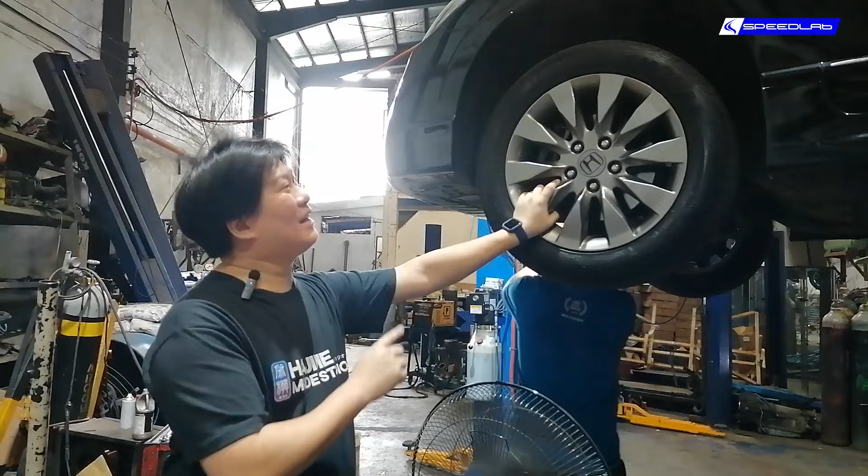Today we'll show you how to properly upgrade the 1.8 Civic. This actually doesn't apply just to the Civic, it applies to everything with the Honda R series engine, which includes the CRV, the HRV, the Civic, all generations from this one, the FD, '06 all the way up to the present one, the 1.8. It's still the same engine up to 2024. They haven't changed it. And the CRV, the R20, I think only appeared in one generation, the third generation. That's about it. Yeah, so everything will be the same.

The intake will be the same. The header will be the same. The exhaust piping will be the same. Even the remapping procedure will be exactly the same for anything that has the R series engine. So we'll start by taking out the stock components, which is the intake and the whole exhaust, and then we're gonna be putting it on the dyno. Then we'll be remapping it by reading the stock ECU and pulling out the data. We'll modify that and write it back to the ECU.

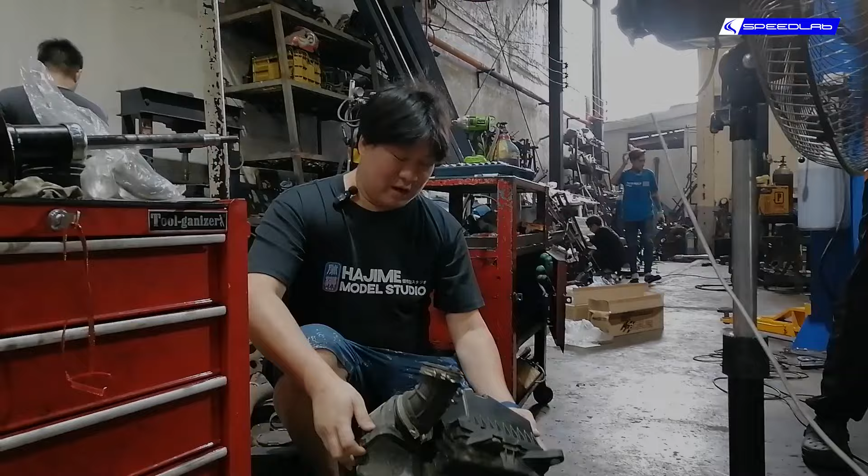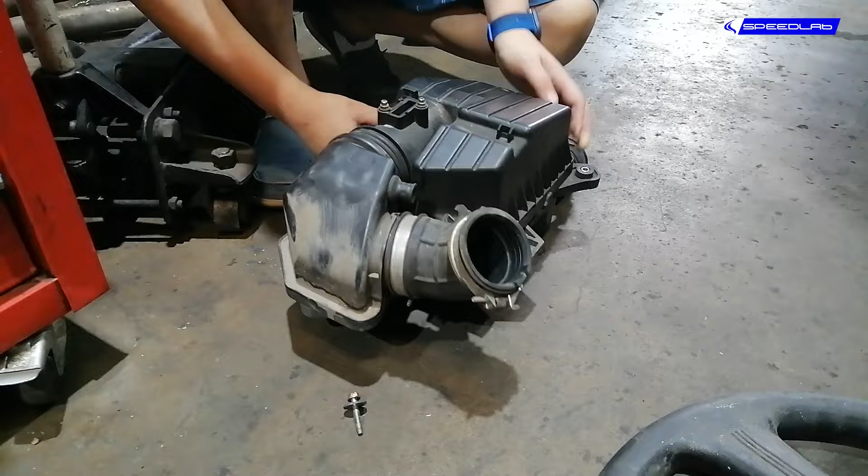Okay, we've removed the stock intake, and this is all there is to it. Actually, there's still a big silencer here at the bottom, which we just leave. We don't really need that anymore. So the important thing that a lot of people ask is what happens to the sensor, which is over here. This is the mass airflow sensor. That has to go back. If this doesn't go back, the car won't run. So we're changing it out with a short ram intake. So basically we're replacing this entire thing. We're changing this out with a K&N cone filter.

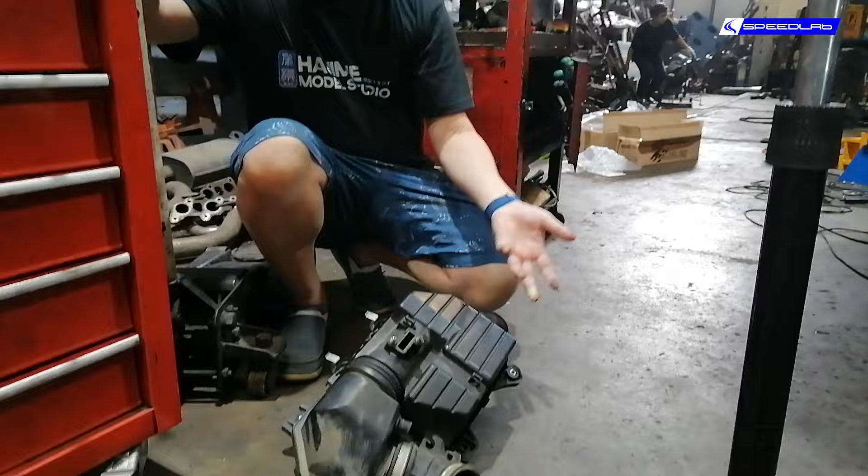So the biggest advantage of having a cone filter is that there's a lot more flow to the filter. So you guys have been masking for the last 2 years. The easiest way to put it: the stock filter is you have a mask, and if you change to a K&N, you just take off the mask. So you breathe a lot easier. You breathe in the same amount of air, so your lung capacity doesn't increase. It's still about 4 liters for an adult. The same way, by changing to a K&N filter, you do not increase the air volume. That's the number one misconception that people keep saying on the internet.

By changing to an open type intake, you increase the volume of air going to the car. Wrong. That is totally wrong. It's still 1.8 liters. It does not magically become 1.9. It does not magically become 2. What happens is you increase the flow, or how fast or how easy the air gets into the engine. So that's why it's called a mass airflow sensor and not a mass volume sensor.

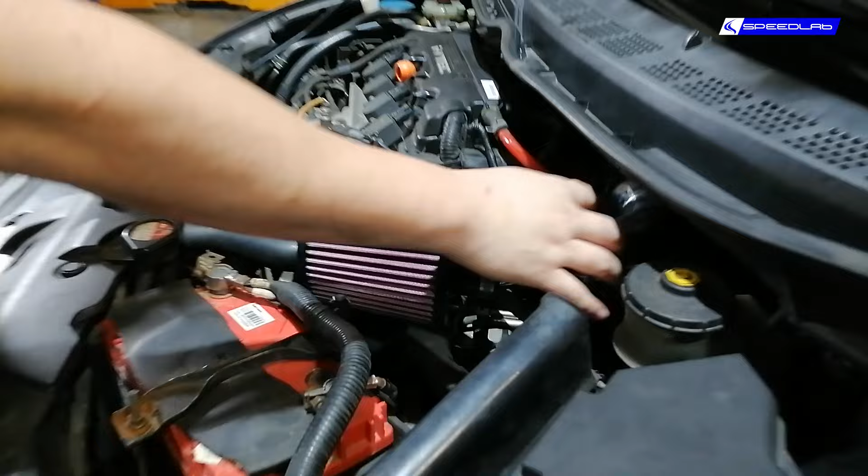And so here we have our entire intake system. It consists of the tube here. This is where the sensor mount is. This is the K&N filter. This is reusable, washable. You wash it once a year, and this will last you the entire lifetime. Or as I can say right now, by the time that we're all driving electric cars, this will still work. This will still filter. And this is the stock exhaust system of the Civic.

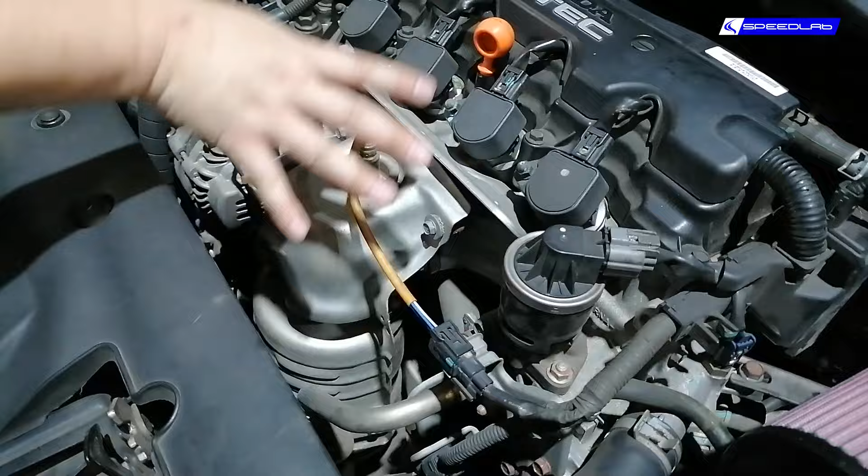This is the start of it. This is the header. It is a 1-1 header. It's not 4-1. It's not 4-2-1. So mind you, anything that you researched on the internet will not be applicable to this engine. So don't even bother trying. This big fat thing here, this is the catalytic converter. We'll get rid of that because that's a major source of restriction. And yes, you will still pass emissions.

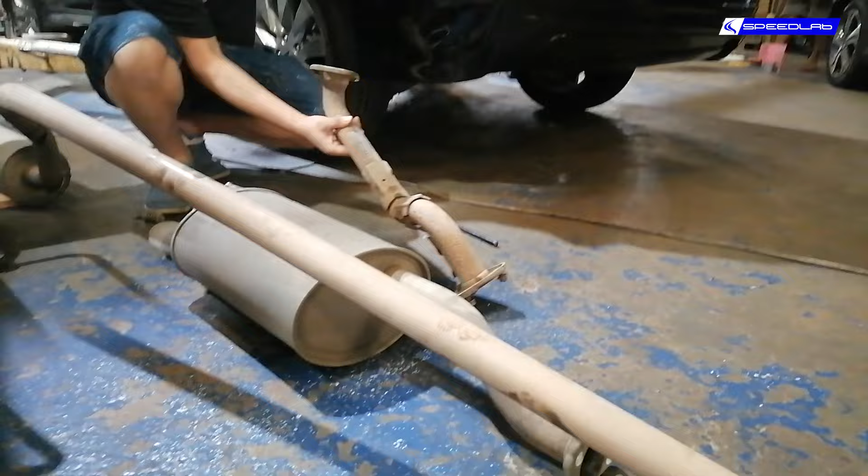This thing here is the oxygen sensor. This is the primary sensor. This is the secondary sensor. Both of these have to go back. If they don't go back, then that's where the check engine light comes in. Then we'll change this out all the way to the back. We've removed pretty much the rest of the exhaust system. So this connects to the header as you saw in the front. This is the mid pipe. So this is your entire exhaust system. This, for all intents and purposes, is the mid silencer or resonator, and this is the muffler itself.

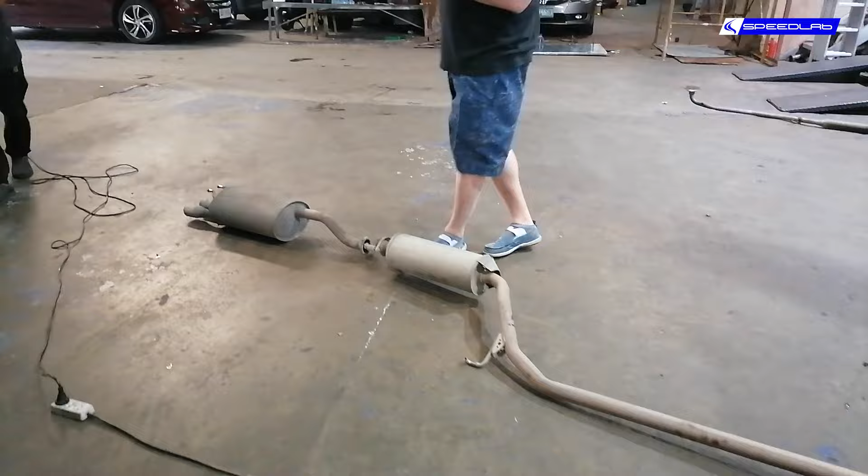Just for terminology's sake, anything that's in the middle is pretty much considered a silencer or a resonator. Anything at the back is considered a muffler. That's the common terminology. But in reality, every single silencer in the entire world is also a muffler. Now that's a bit confusing, isn't it? So we'll be replacing this whole thing with stainless piping. This is not stainless because as you can see it's kind of rusty already.

So we'll be changing out the back with a Tanabe muffler because the guy wants more sound. Again, the muffler's job is to muffle. To muffle means to make quiet. Changing out the muffler to something less muffling means it has more noise. I really don't understand why people confuse it. It's muffle. To muffle is to make less noise.

And the piping size we'll be using for this one is the same size as this one, 1.75 inches. And no, bigger is not better. That is a horrible misconception again that is on the internet. So you don't use 2-inch, you don't use 2.5, and definitely you don't use 3 inches. As much as possible, you keep it the same size as stock. Because the bigger you go, you make the engine air fuel mixture inside leaner.

It's not about back pressure. There's none of that. That's also another BS term. There is no such thing as back pressure. There is no equivalent pressure pushing air back through the exhaust. So no, that is another horrible term which I really hate reading. There's no pressure except for whatever atmospheric pressure we have right now. It's what we're breathing. That is the only pressure that we have here. There is nobody with a hose at the back of the car forcing air back to the engine. So it's not back pressure.

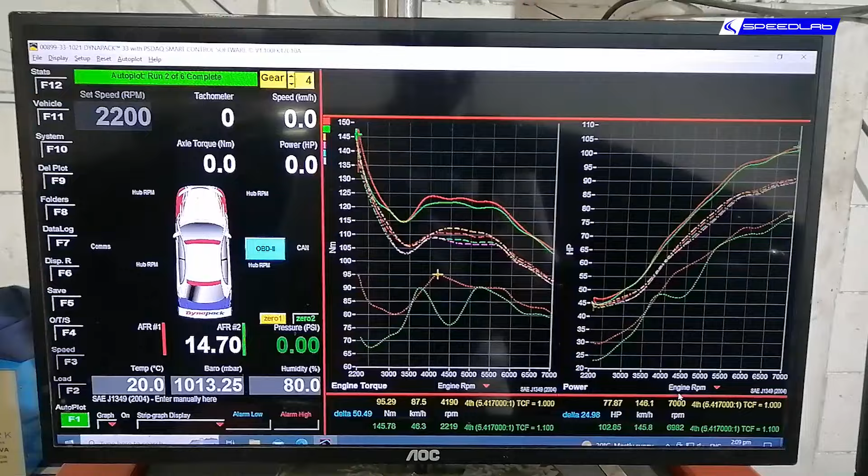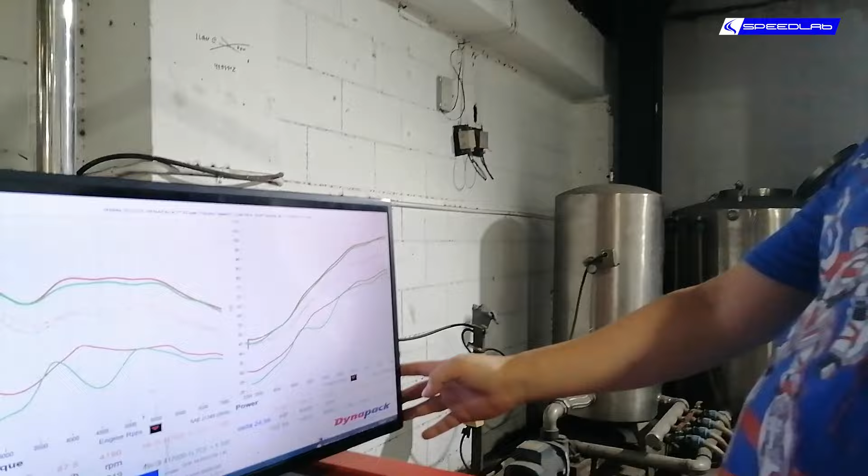Done with our Civic upgrades, and then here are the results after the ECU remap. So we did a baseline dyno first. This is our baseline dyno here. So it's about 80 horses. That's a bit on the low side. What's the mileage of this thing anyway? 73,000. That's actually not very high. Well, that's why he's here. Typically for the 1.8 Civics, we should see around 90, 100 horses stock. So this is 80, so it's making about 10 horses below that. That's the reason he's here, because he feels that the car is slow. So we just confirmed that it is a little bit slower than stock.

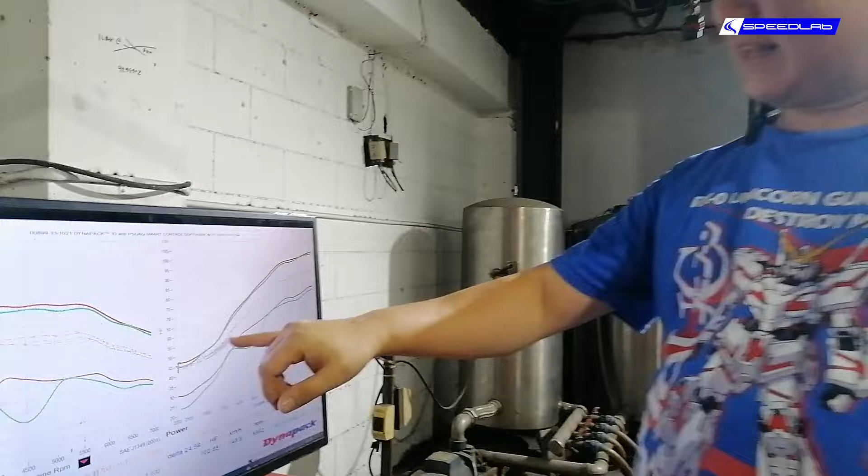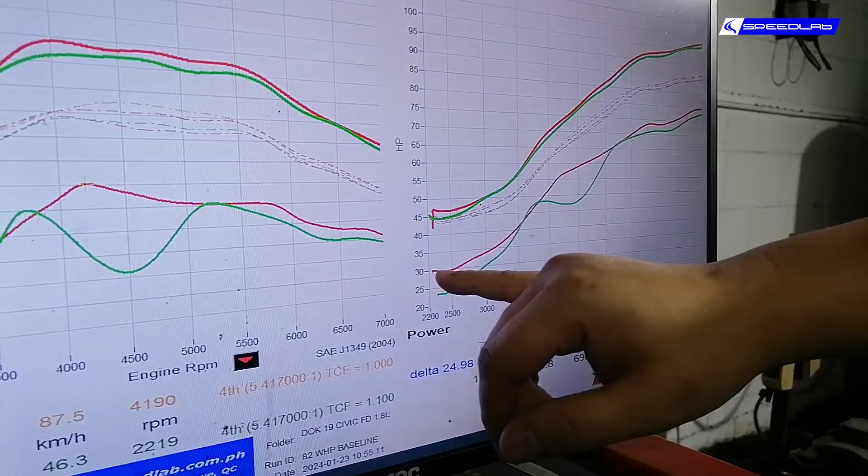Then this dotted line here, this is after our intake and exhaust upgrades. So we went from 80 to about 90, so we got a total of about 10 horses on average. Here on the bottom end, we actually got a 15 horse bump from 30 to 45. And this is about 10 horses all the way here. So we're averaging 10, 15 horses just with the intake and exhaust. That's actually not bad for an intake exhaust. Usually we see around 7 to 10 combined.

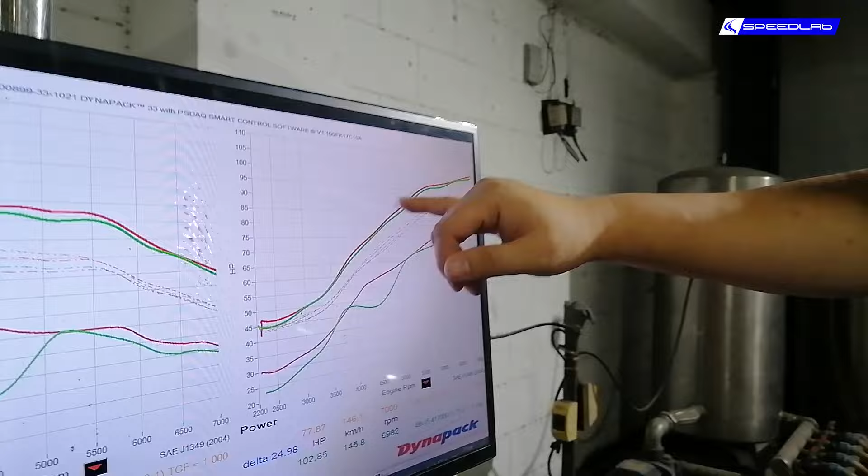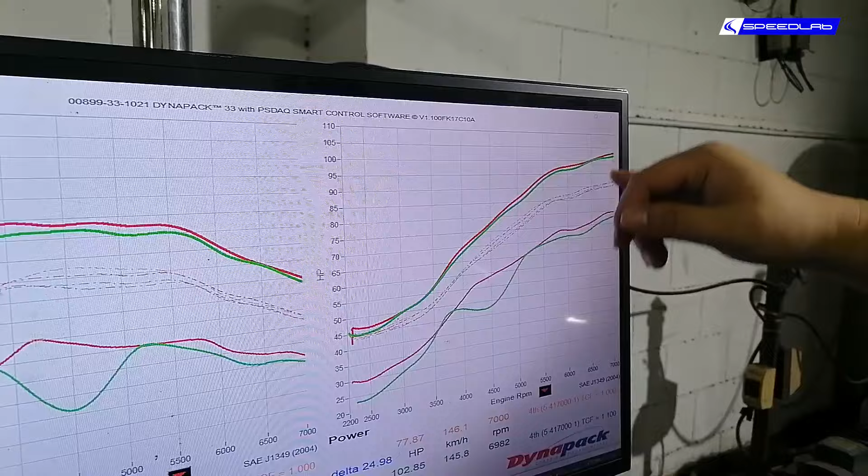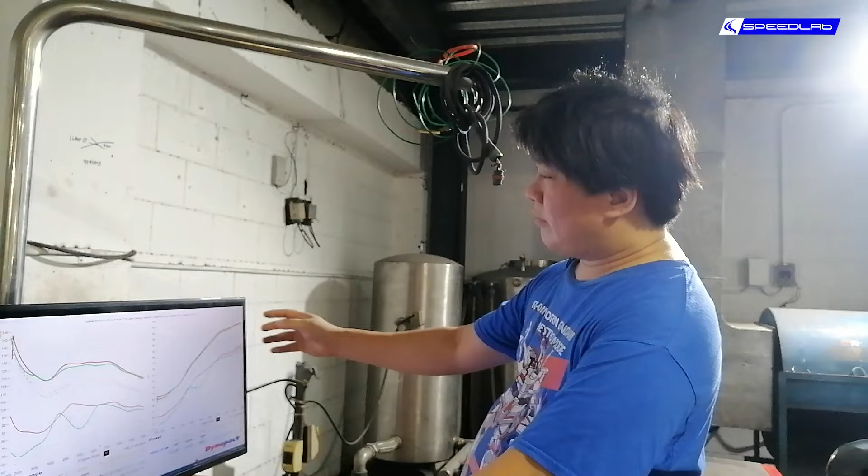Then this third solid line here is the ECU remap. So we ended up at around 103 horsepower here. So that's a total of more than 20 horses from stock to this one. This is much more like it, but again, it's a little bit below standard. If your Civic 1.8 is completely healthy, we should see final power in the 110, maybe 120 range after tuning.

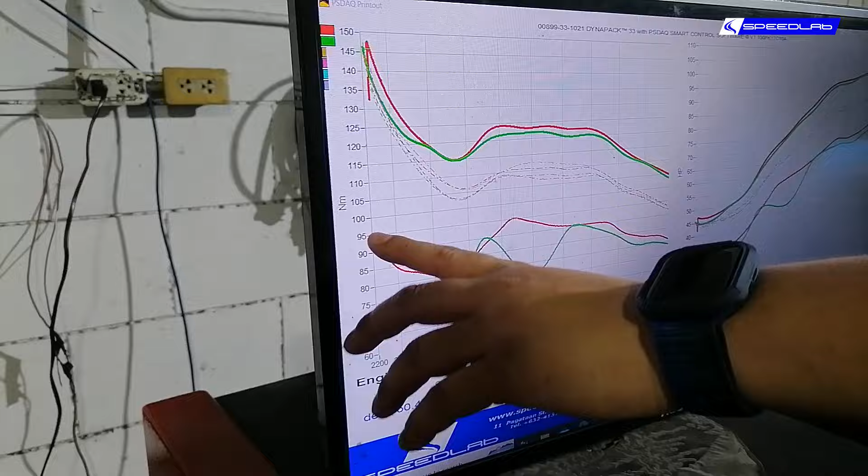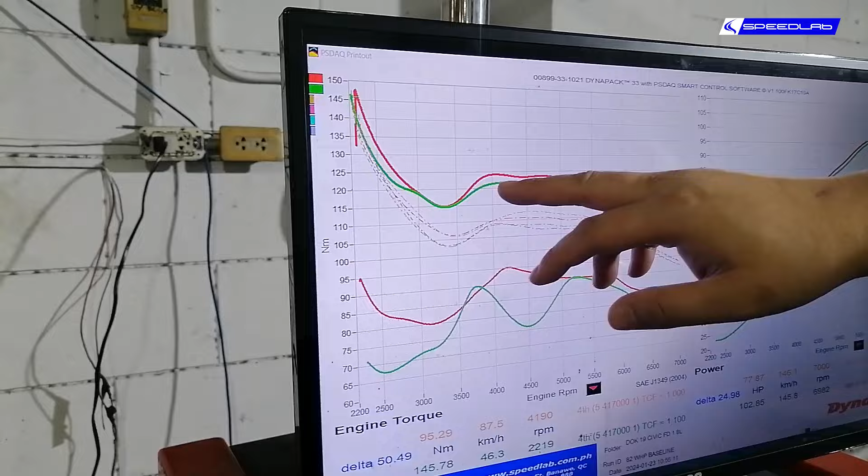So, torque also increased. Here's our stock torque, 95, and then we went to 145 here. So the torque is actually pretty nice, and you feel it right away at 2,200 RPM. Even here, when it goes down, you're still making a lot more torque than in stock form. So this is actually what you feel when you step on the pedal. Not this one; what you feel is torque.

And drive this thing normally, you should get about 8 to 10% better mileage, because before, you used to step on the pedal this much to get this much power. Now you step only half, you get the same power. Instinctively, without thinking about it, you let go of your right foot. That's where the fuel economy savings comes from.

And most of your driving is done within 2,000 to maybe 4,000. Apparently that's high for most people. 92 out of 100 people I talk to say that they never go past 4,000 RPM because they think that the car will explode. Stupid notion, but very, very rarely do people reach the 7,000 RPM red line. That almost doesn't happen here in the city, and most people don't even bother trying to reach that.

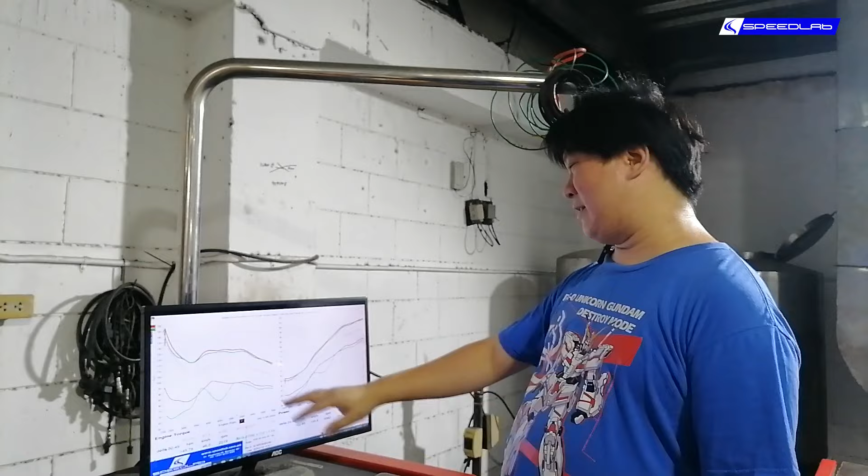They just stay at this part, and 99% of your driving is just here, where you're not even utilizing the full 103 horsepower of your car. You're only utilizing around 70, and that's already at full throttle. This 70 horse mark at 4,000 is full throttle already. So if you're doing only 10%, 15% throttle, your horsepower is somewhere here in the 20, 30, 35 region. Something that most people don't realize. So again, with remapping, you get the additional power, and you get the additional fuel savings as well.